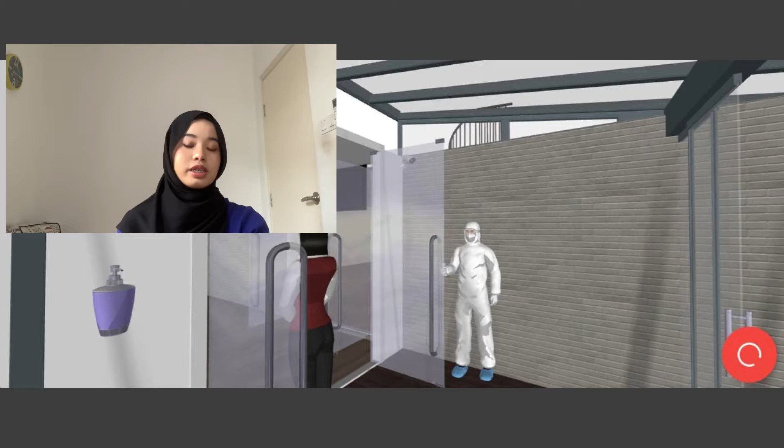Is it important? The answer is yes. Why? Because staying sanitized can help you fight bacteria or some of the most dangerous viruses. So it is important to stay sanitized and keep your health okay.

Where do we put the sanitizing station? The main area is because if workers are entering the building they must be sanitized, and it is easier for them to sanitize before working. So before entering the building you have to sanitize, because from the outside we never know what bacteria or virus could be on them.

How can sanitizing help us prevent having COVID-19? It is because if you use a sanitizer, it can reduce the germs from your hand or the areas you have been touching. You might be touching a surface from the outside that might have germs from a virus, so it helps to kill the germs, 99% of it.

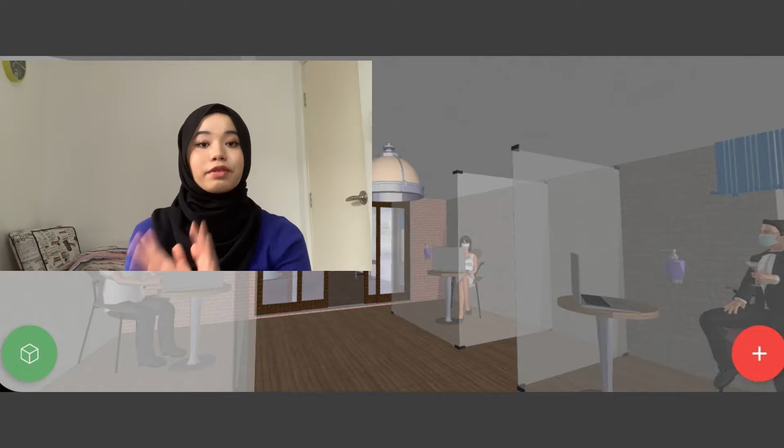How can partitions help workers prevent having COVID-19? Partitions are proposed to serve two critical functions: intercepting the respiratory droplets that are thought to transmit the virus, and reinforcing physical distancing requirements even when users are unwilling to or forgetful of maintaining it.

And the last one for the conference room is scanning MySejahtera before entering one of the rooms, which will help us keep track of whether the room is a high risk to enter or not.

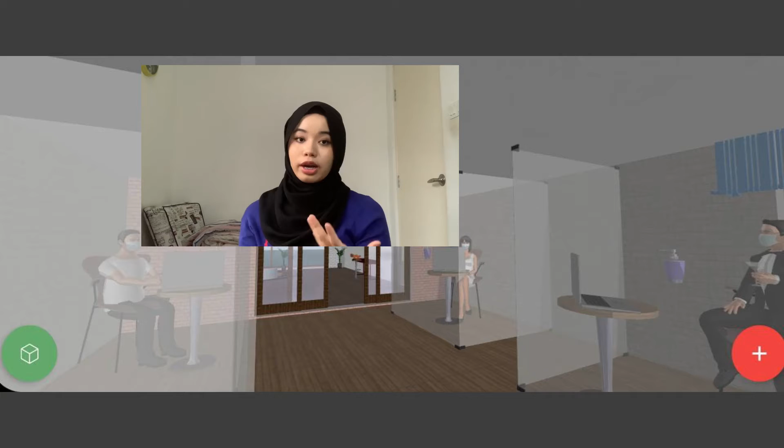Every company must have a common area. The common area can include the lobby, breakout area, or cafe. All tenants leasing space in the building will share the cost for the common areas. It's very important to have an area in your workplace so people can socialize without distracting others.

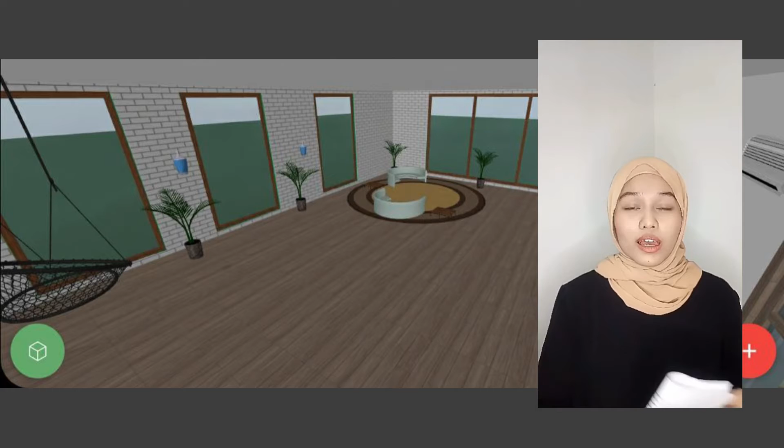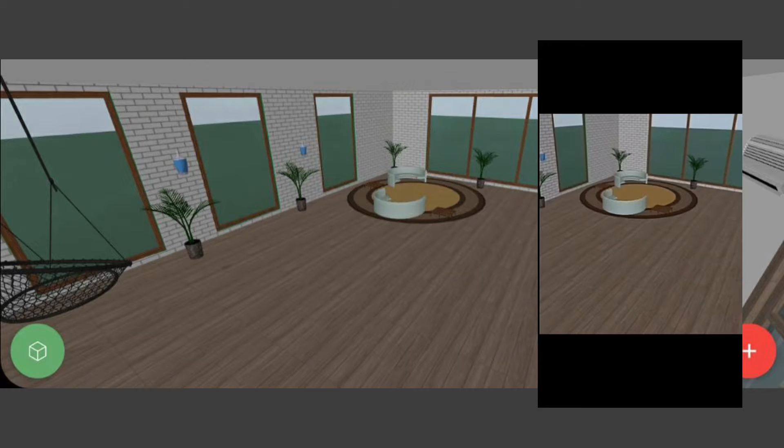Next, we have the pantry. We provide this area to the staff so that they can have their own break time. At the same time, we try to help improve the air cleansing system.

Consider using a portable High Efficiency Particulate Air (HEPA) fan or filtration system. Installing no-touch activation methods is actually a very good idea.

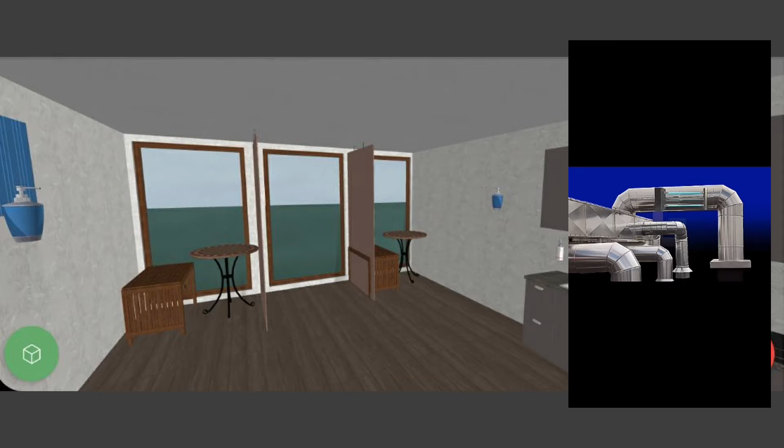We also provide UVGI. UVGI is a method of disinfection that uses short wavelength ultraviolet light to inactivate or kill microorganisms or pathogens. Essentially, UVGI is the use of light with sufficiently short wavelength to disinfect surfaces, air, and water. UVGI in an HVAC system can help eliminate up to 99.9% of viruses and kill up to 90% of certain airborne bacteria passing through the air system.

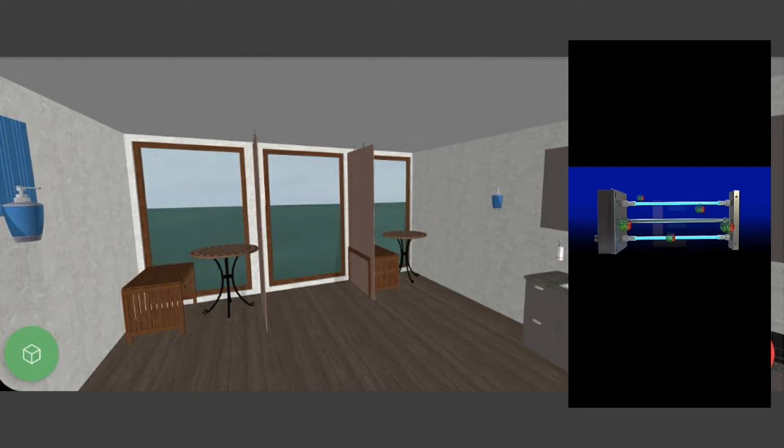On top of that, because of this pandemic, we must keep employees coming to the office, but we still have to follow government orders, so we try to decrease staff movement at the same time. As you can see in the sample, we try to put a partition to separate them to keep social distancing.

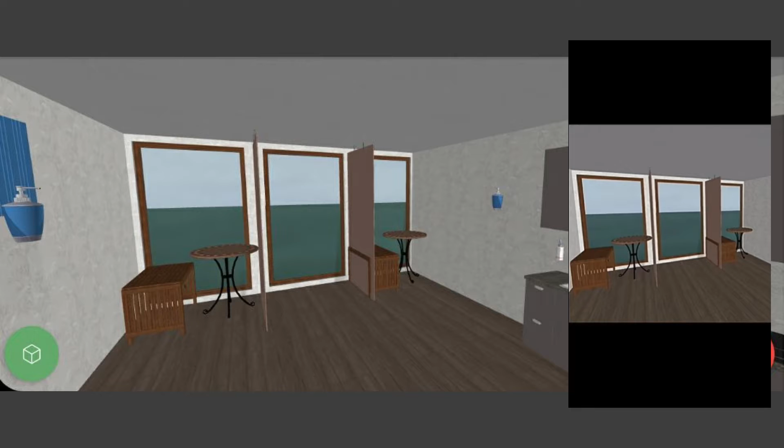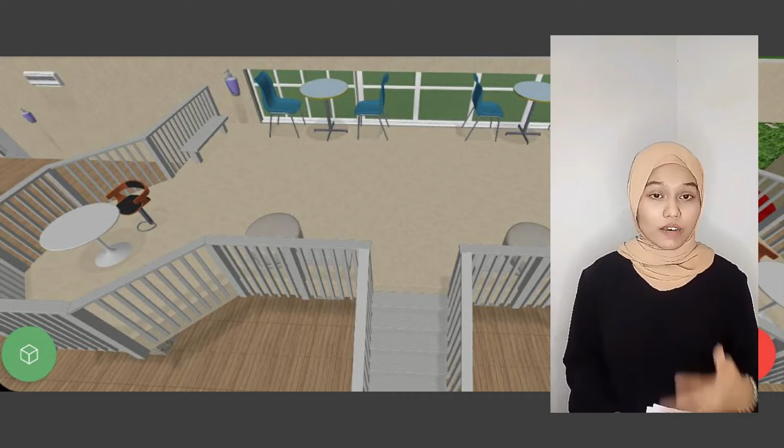Next, we move to the creative space. A dedicated creative space allows for functional or project team collaboration without interruptions, with necessary tools and technology to support the creative process. The impact of COVID-19 makes every company have to be more creative to ensure staff can come to work while still keeping social distancing.

First, we use methods to physically guide employees in all areas of the building by using signs, tape marks, or visual cues to show where to stand and where to face physical barriers.

The office will likely invest in hand sanitizer and other disinfectant products, creating stations around the office so people can get a quick squirt of sanitizer or a wipe to use before conference room meetings or the like.

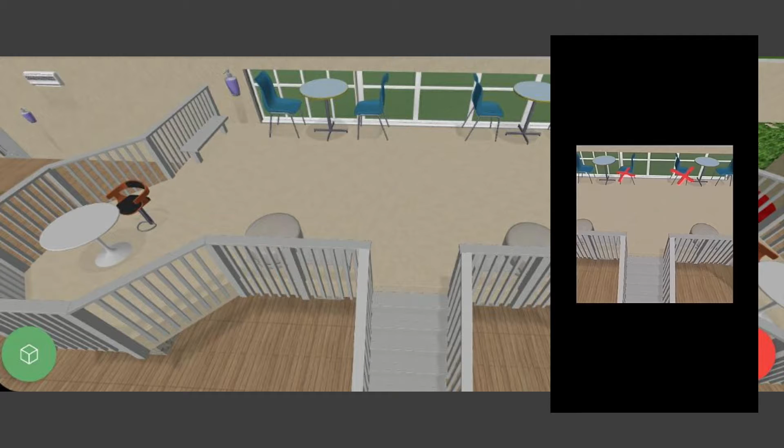Workstation: we provided gloves for our employees for hygienic purposes when receiving parcels and packages. We also provided lidded trash bins for each employee to keep their place clean.

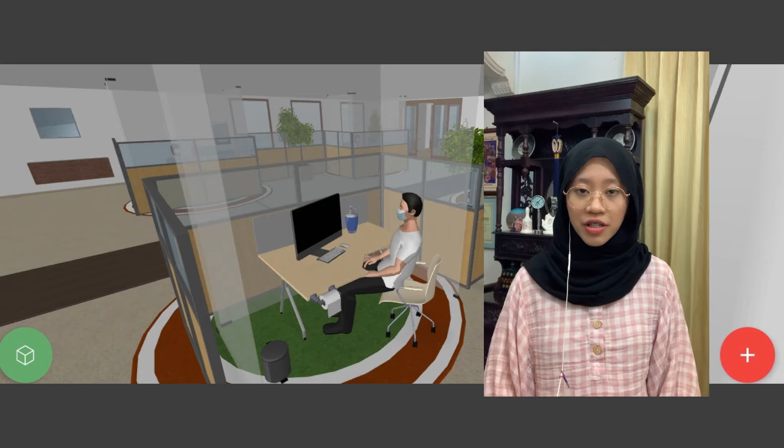We are using rugs with red and green colors because green represents calmness and red represents passion and energy. For workstation arrangement, each table is 2 meters apart to ensure social distancing and keep employees safe while working.

We put plants in the office because during the day, plants absorb carbon dioxide. Indoor plants have been shown to reduce CO2 levels by as much as 10% in air-conditioned offices, and up to 25% in those without air conditioning.

We are also installing no-touch sanitizer on every wall so it is easier for staff to always stay sanitized. Lastly, each workstation is built with a transparent shield to protect each employee from water droplets from others.

This is to ensure employee safety from the virus spreading. This is the best way to prevent the virus from spreading among employees.

If you see the arrangement of the chairs, why did we modify it? It is because we arranged the chairs for a single space so employees have less interaction with other workers.

We also use ultraviolet germicidal irradiation, UVGI, in the pantry. UVGI is a kind of light. Based on our studies, UVGI light was an effective method against contamination by bacteria or dangerous viruses, eliminating viruses, bacteria, and other contamination in that space.

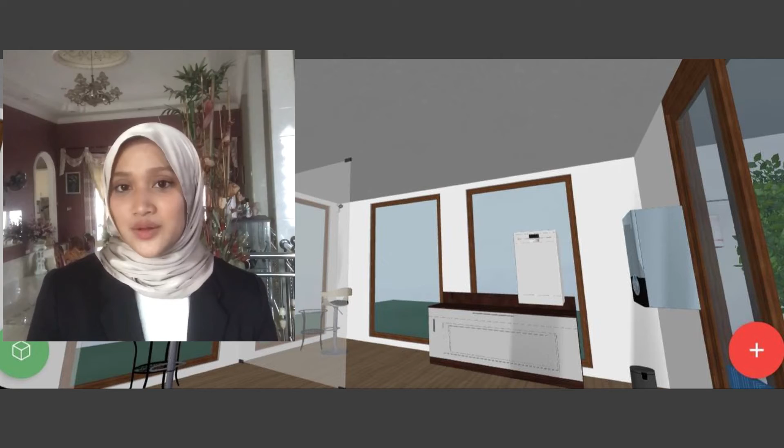Workers just need to choose a coffee and it will produce the perfect cup, from grinding the coffee beans to tamping the grounds, pulling the espresso shot, and frothing the milk. The push of one button triggers the entire coffee-making process. From here, we can limit the touch compared to using manual coffee making with a kettle.

As you can see, partitions are used in many parts of the office to keep workers aware of limitations on talking or sitting distance.

Basically, the pantry and snack station are in smaller rooms because there is a limit to how many workers can gather in large numbers at the same time, and it's recommended to use the get-and-go method.

Manager's room: to help improve air cleaning, consider using a portable high-efficiency particulate air (HEPA) fan filtration system, especially in closed-plan offices like the manager's office. This also increases the percentage of outdoor air, for example using economizer modes of HVAC operation, potentially as high as 100%.

We also use natural ventilation, for example opening windows if possible and safe to do so, to increase outdoor dilution of indoor air, as environmental conditions and building requirements allow.

The restroom will have to be outfitted with new touchless technologies such as taps and automatic doors to prevent germ spread, and potentially another wave of coronavirus.

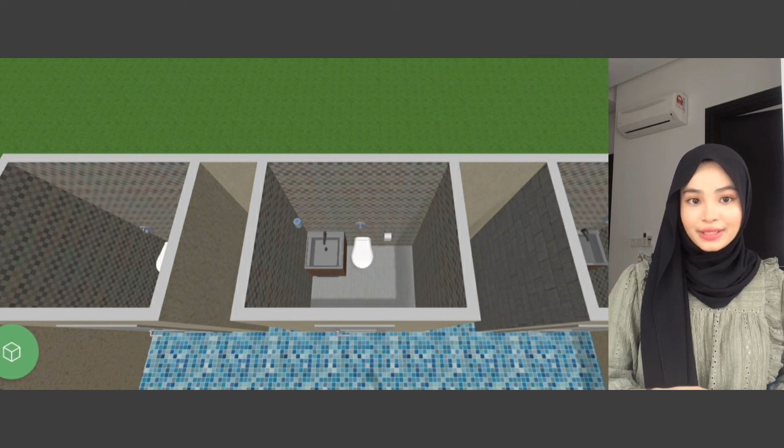Next, the innovation of sensor taps and fully self-cleaning cubicles designed to not require human contact. This is because technologies like touchless faucets, sensor flushes, and automatic soap dispensers improve cleanliness by reducing touch points.

Lastly, splashing of aerosols could be a major cause of bacteria spreading, so we focus on technology that limits this, like AquaBlade, a disruptive innovation for flushing the toilet.

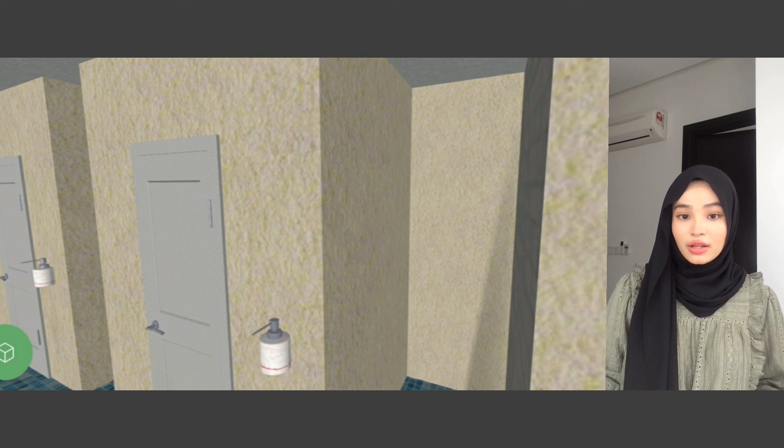We are moving on to the next point, which is installing more soap dispensers. It will help a lot in preventing COVID-19. This means that if paper towel dispensers are installed, a lot more towels will likely be needed as well as soap.